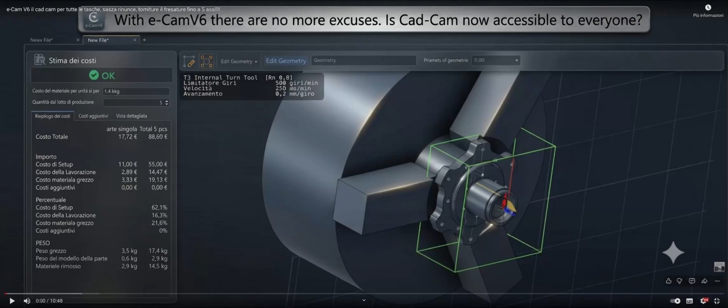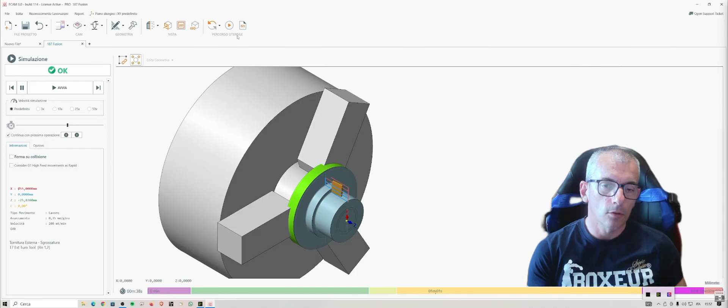Today we're talking about CAD, and in particular eCAM, and its version 6. I've already talked about it and you've already seen it, but I want to explain why this tool is becoming very important, eCAM itself, for artisans, hobbyists, and companies. In my opinion it's good for all companies, but it goes especially well with small businesses.

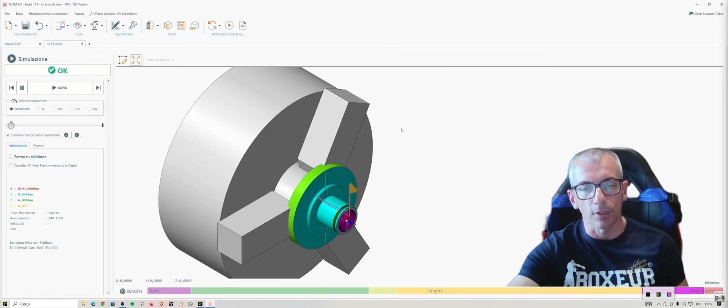I've shown in my videos, also using a simulated milling machine, that you can program the CAD-CAM system for a milling machine without any problems - you can do anything you want. I've made some videos in what I call my virtual workshop. Now that the CNC lathe from Rownd Precision has arrived, I'll show you how I'll use the CAM.

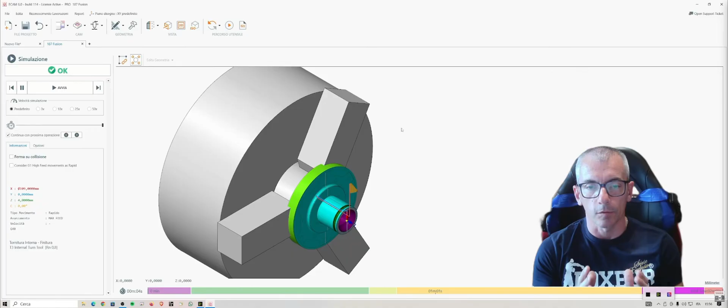Then there's the post-processing issue. If you spend a few thousand euros on a CAM, you won't get much done without the post-processor. So the manufacturing company asks you for another 1,000 euros for each post-processor - that is, if you have a Fanuc control, a numerical control, a Siemens control, and a Haas control, another 1,000 euros per processor.

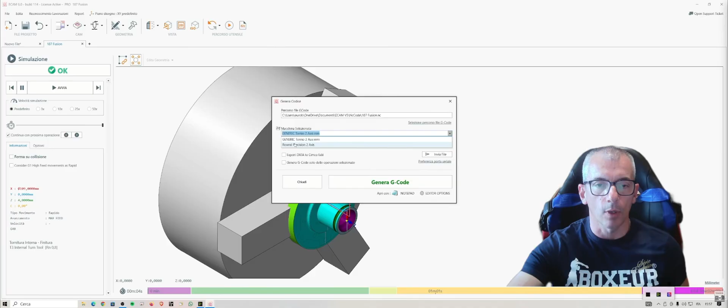Well, eCAM already has these on the site - working with eCAM version 5, and currently being processed with eCAM, at least when I'm talking now, with eCAM V6, the post-processors will surely be available. But not only that, I made my own post-processor for Rownd Precision. Why? Because - have you seen the program that was run? You press G1, and it shows you what post-processor you have.

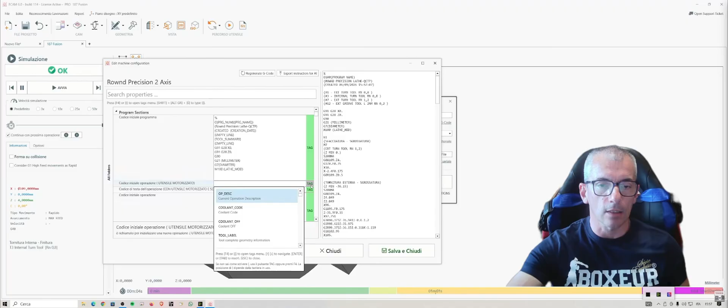As you can see, I have my Rownd Precision post-processor here, and I edit my machine tool. Here you can not only make all the changes to the post-processing - obviously you have to figure it out a bit to understand - but you also have tags to look up. This gives you all the codes that you can insert in either operation.

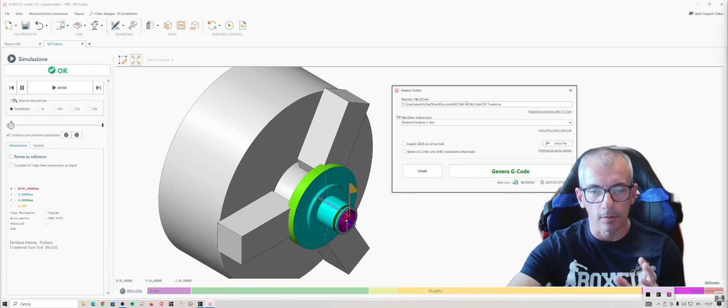I'll do this now and close without saving because I don't want to modify my Rownd Precision post-processor, but I've always managed to model the post-processor of my machines by myself. It may take a couple of weeks to take possession of all that information.

Really cool. Now you can insert the gripping system sims. I've inserted the standard one now, but I'll show you something quick without editing, to manage the fixtures. Here they are, you can go.

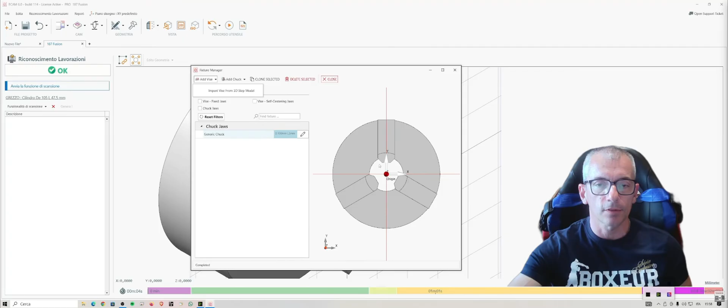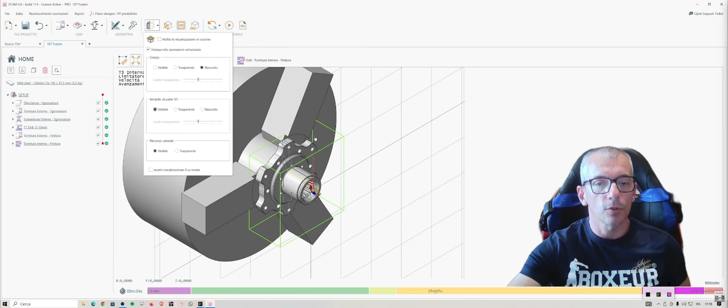Do you see this program? I'll show you this program from here. I make the raw material invisible and the 3D model visible. Everything was created following a 3D model provided by a customer, as you can see.

So you can start from a blank page and draw your piece, or put in the point-to-point programming. You can import a two-dimensional drawing, the classic DXF, DWG, AutoCAD. You can also import the 3D. Lately I've been using the 3D, obviously.

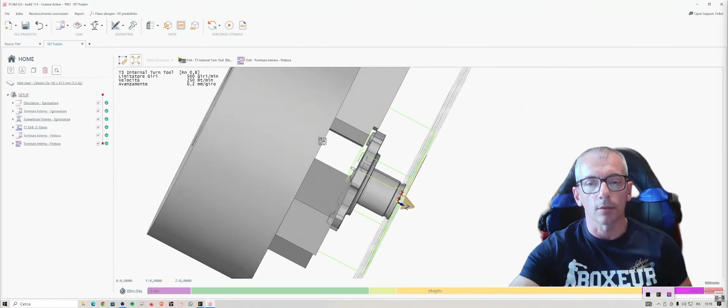You then need to learn how to use all its facets. However, on the Ecam website there's a series of information, short tutorials. It's in English, but you can right-click translate and have it in Italian, menu in Italian too. So you don't even need a real course, because they charge you for the course.

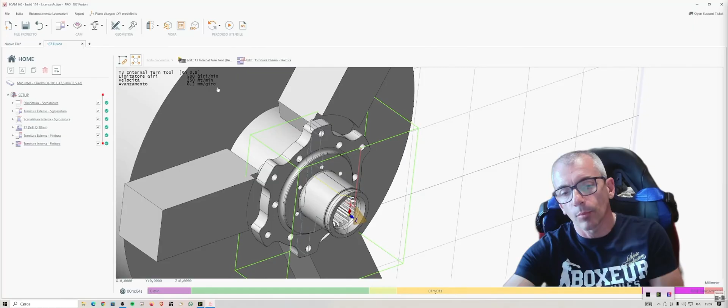I learned to use this on my own. In my opinion it's a very, very important tool. If I don't have the link already, I will add it, but I think I already have it on the programmer's

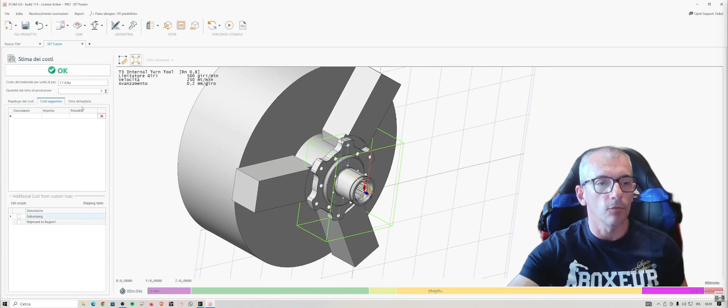So you already have an idea of the relative times for your company, but then you can also estimate the costs. It's an estimate of the cost that you can then batch based on the costs of your company. So it helps you make estimates, think about how much time you save.

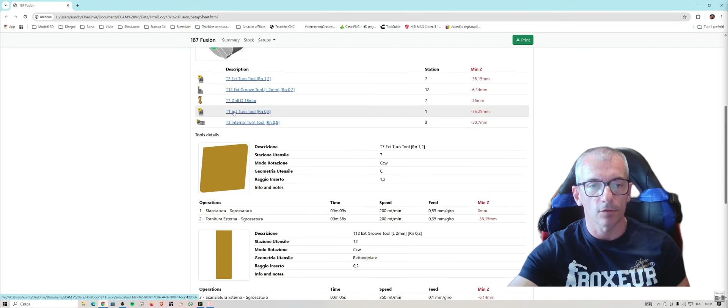And I think there was another thing, the summary report of the tools. But you can find everything in the report, so you have a really complete tool at a relatively low cost.

Daily, but above all, the wonderful opportunity to test it for a fairly long period, 14 days free, and then indefinitely with free Sundays and Saturdays. But Sundays and Saturdays should be spent with the family, not at the company.